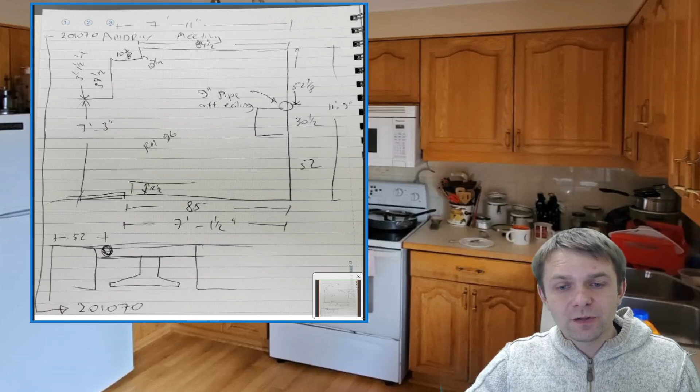I measured the space, and to give you an idea, this is how the kitchen looks. So this is another thing. When you measure and you have the cabinets like you saw before, in this location there was a pantry standing. So behind the pantry, they never knew that there's actually a bulkhead.

So remember this: when you have a pantry in the kitchen, when you open the doors, it's not as deep. There's a high chance that this pantry is going to have something behind it like a bulkhead. In this scenario, there are some pipes going through. The bulkhead above here, there's nothing there. This is just decorative. So this is going to be removed and we're going to put in a nice cabinet going all the way to the ceiling.

So this is just kind of how the kitchen looks all around. You see the exhaust pipe is off center. So you really have to make sure. This is me doing the measurements, going this way. So that's how the kitchen space looks.

So again, when you look at this, take your time and just grab a measuring tape and start measuring from the beginning, from left to right. Draw a plan of how the kitchen actually looks, and start measuring each wall. Measure the bulkhead and write everything down. Before you start designing, you need to have proper measurements.

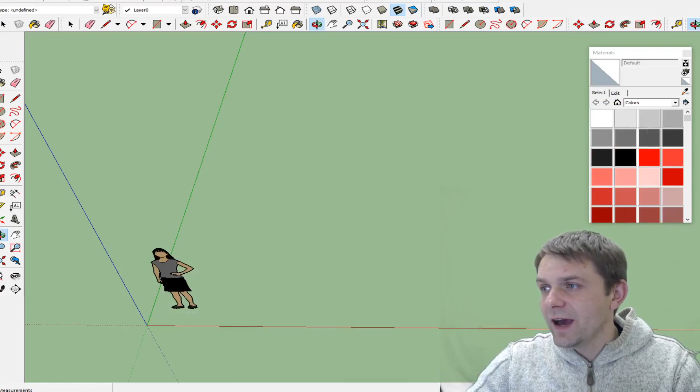You can use it and start drawing the walls. So we press L for line. We basically get a line and we'll start with some sort of measurement. So we're going, and the green line is indicating which location we're going, because you're actually drafting in 3D space. So whenever you draw, it's actually in 3D, which is pretty cool.

It's exciting and it's interesting, and it's fun because you're doing it in 3D, so it's not like AutoCAD software where everything is more complicated to do. This is SketchUp. It's easy and it's a lot of fun.

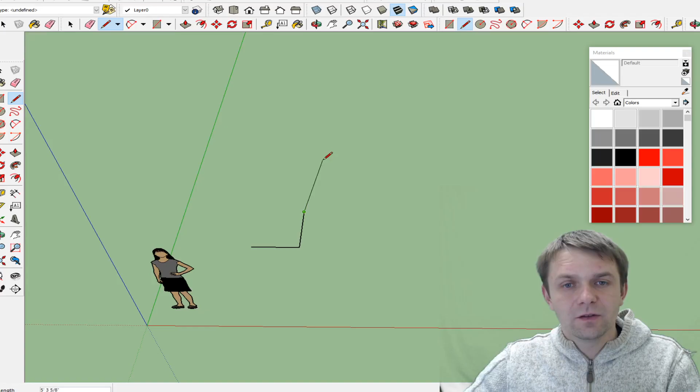So we have 37.5 inches going this way. Now you see when I point the line, if I do it this way, it's continuing, so it's green. If I wanted to go up, this is red, so that's going back. If I wanted to go up, this way is green, this way is blue. Now it's going up, but I need to go this way because I'm doing my bulkhead.

So we have this wall. You don't have to continue, you can stop and do what you need to do. If you want to continue, you continue. So this one together, 11 feet plus 9, 3. Oh sorry, so that's 11 times 12 plus 3, 135 minus 52 minus 52 equals 30. I have 30.5, okay so that's okay, 135.

So this way, again, if you see blue that means it's gonna go up, so that's not what I want. I want to be drawing on the green axis, so this is, sorry, I got 135. So 135, and you press enter. And now this way, I'm going, so now I'm on a green line, 80, I'm going to the walls, to the door, so 85.

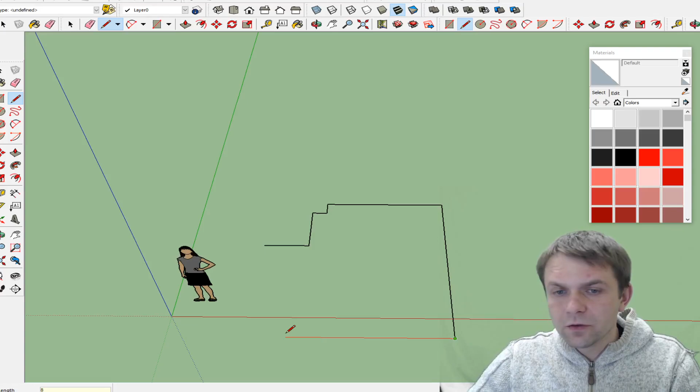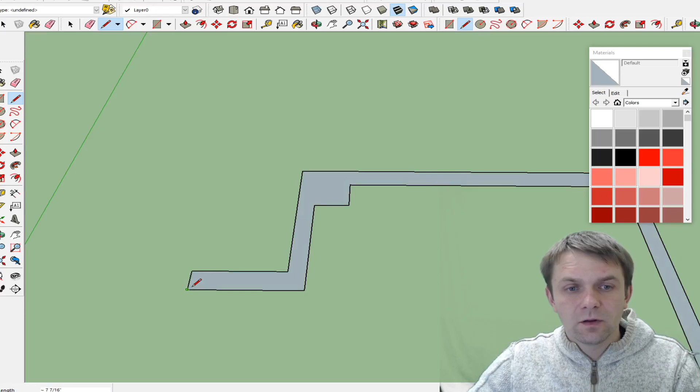So what I usually do is I go 6 inches this way roughly, and go this way. The great thing is that it gives me a point when it lines up. I don't want it to line up, I just want it to go like this and like that. So this is my floor plan. I have the floor plan ready. Now, the crucial step is to make this floor plan a

3D space, so we can play around. This is the size we have. So now we press P, and what it does is it pulls. Now what we need to know is our height, in my case it's 96. Type it in, press enter, press O for orbit, and then press escape, or press this button right here, the arrow.

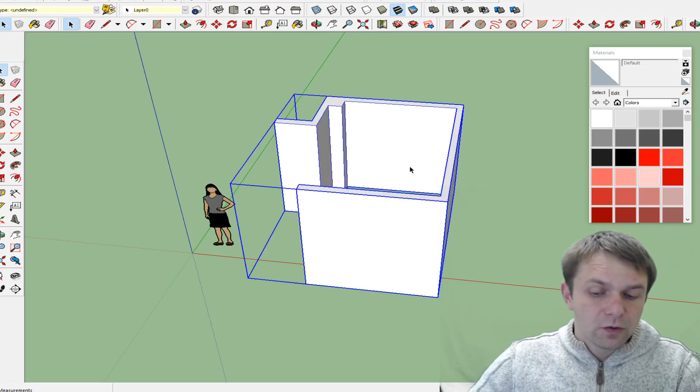And we need to triple click, right click, and make a group. So this is the most important part in your kitchen design, you need to have this step. You need to understand this step, because when you make a group, now this is its own entity, and when you add stuff to this wall, it's not going to get attached.

Because if I don't make a block and I attach cabinets, in order to modify something it's impossible. You have to start from zero, and you don't want to design half of your kitchen and then go back and start from zero. So this is your starting point, right? This is what you need, and then you work in blocks.

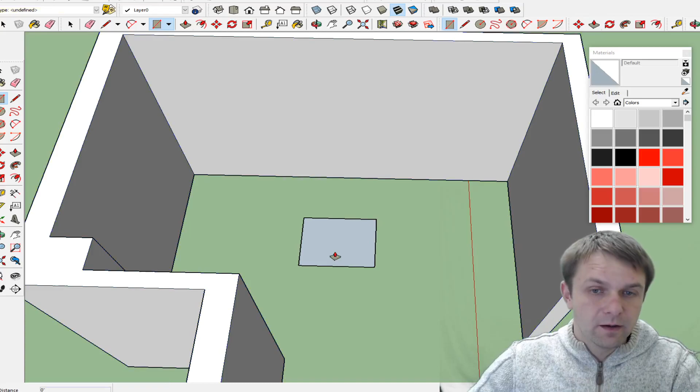I'm not gonna go too detailed on the actual cabinet design. I can make a line, and make a 30-inch by 26. I press R for rectangle, and make it 36 inches. This is gonna be my stove. Triple click, make a group, and M to move it.

Again, it gives me a center point, and then I can see if it's the center of this wall. If you want, you can do the measurements from here to here, 4 feet 4.5 inches, 4 feet 4.5 inches. Perfect, so I'm in the middle of my wall for now. This is where I want to start, this is going to be in here.

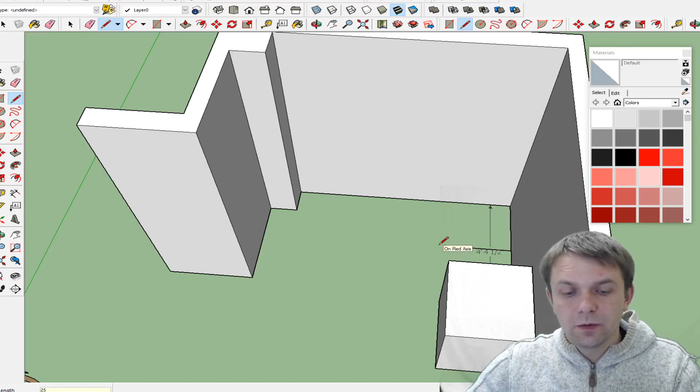I'm going to add a pantry. So again, our cabinets are 25 inches with the door. So L for line from the corner, 25. Now we go, this was a double. This is going to be a double on what? 25 by 25. So I'm just going to make a block in here.

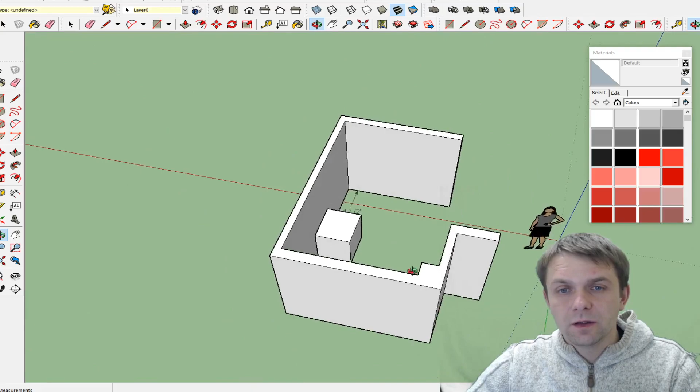P for pull, 34, 34.5. Make a group. So this is a custom design. So this one is going to be, here the client wants to have an oven. So we're going 30 inches and we're going 25.

And R for rectangle, P for pull, and this is going 94. Triple click, make a group. So you see how now these are totally separated, and they're not fixed, I can move the separate items.

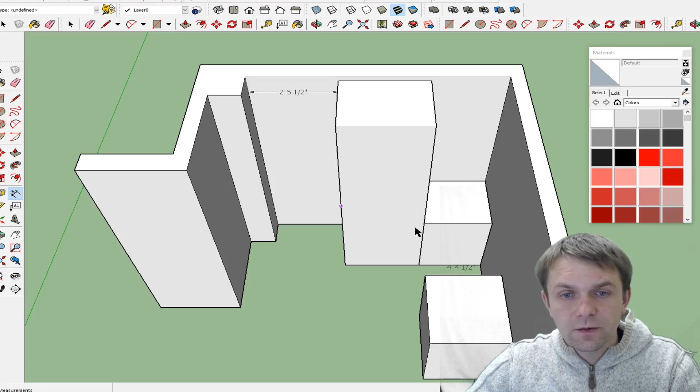The space that I have for the fridge is basically 29 and a half inches. So this is going to be a 28-inch fridge. So line, again, I want to be on the red axis, 28 by 26. And it's 72, so that's my fridge. Make a group.

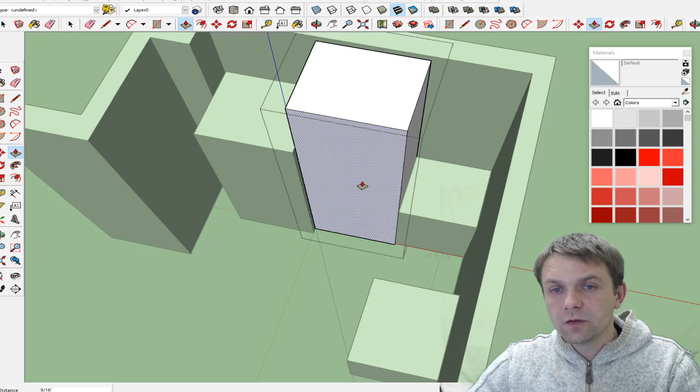So fridges usually stick out a little bit, which is fine. This one is actually going to be a 26-inch fridge. This will be custom cabinets, so we can play with the sizes. And again, I don't have exact specifications, so I'm using standard models.

For now, if I want to draw a pantry and the fridge is in my way, I can just hide it. So this is coming out 25. Let's say this is going to be a 9-inch pantry, and I just want to go to here, P, 94. Make a group.

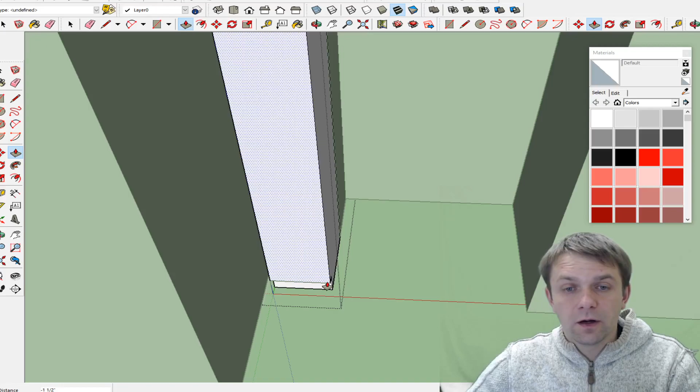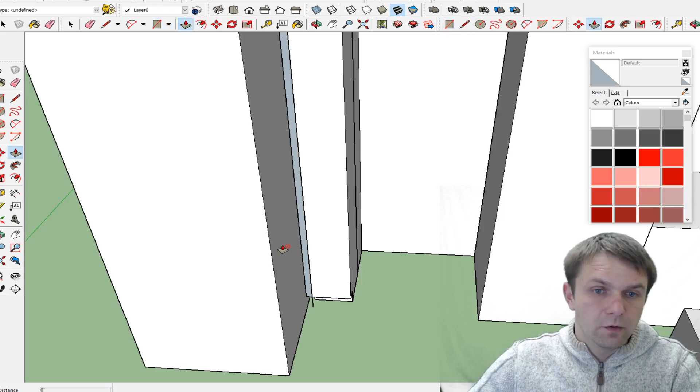4.25. So then you can go as detailed as you want. If you double click, you can edit this block, and you can go as detailed as you want, or as simple as you want. So let's say I just want to add a kick plate, so my cabinet has a kick, and then I want to add a filler.

R for rectangle, and I go to this point, P for pull, I go 2 inches, so that's my filler space. See how when I select this, it's actually doing the line that I created before, which is fine. You don't have to worry about that. This is just a filler, I can always delete it.

And now let's say I want to bring back the fridge. Actually, before I do that, I'm going to double click to edit. Now 4.25.

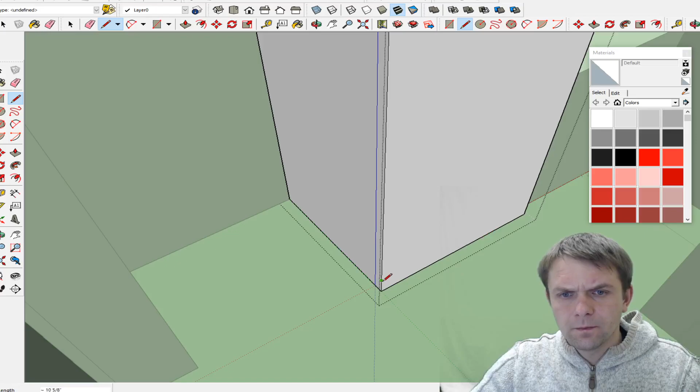Again, adding these details, you kind of have to know what cabinets you're going to be using, and what the specs are. But in general, just to get an idea, this should be... this really doesn't look like 4.25. Oh, it is. Okay, now again, double click.

I want to continue editing this cabinet. Double click, so you see everything highlights. Now I have a 12-inch drawer, so it shows me a midpoint of the line I just created. I'm going here, and then I do another 12-inch drawer, and this is going to be the oven and microwave cabinet.

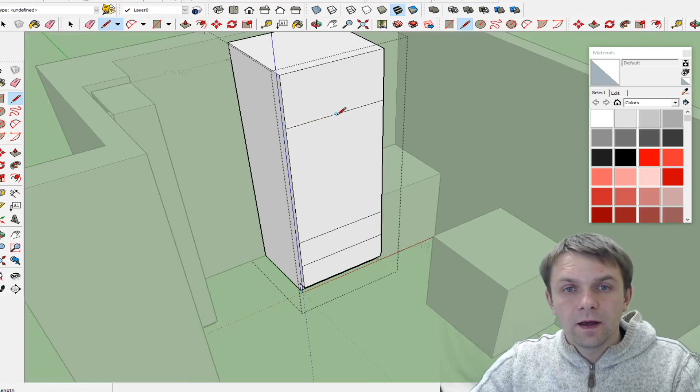Again, you have to check your specs. So let's say this is going to be 48. Okay, and 2 doors here. So that's it, I just press spacebar, unselect, O for orbit.

Now edit and hide all. I can see my fridge is right here, oven microwave combo. I can create another cabinet here.

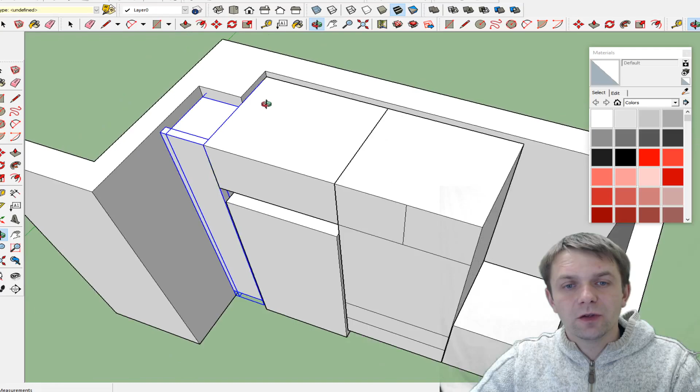So now I select rectangle, P for pull, and there we go. Now I can bring out this, press shift to select this item as well, M for move, and I just bring it forward, which is a good idea to leave a bit of space behind.

So now you can always shim it on the back when you do the kitchen installation, and on top of the fridge you can put a panel as well, so you don't necessarily have to make it very tight. If you're going to be building the cabinets yourself, then leave yourself room. In this scenario, there's not much room for the fridge because we want to put the oven so close to the countertop.

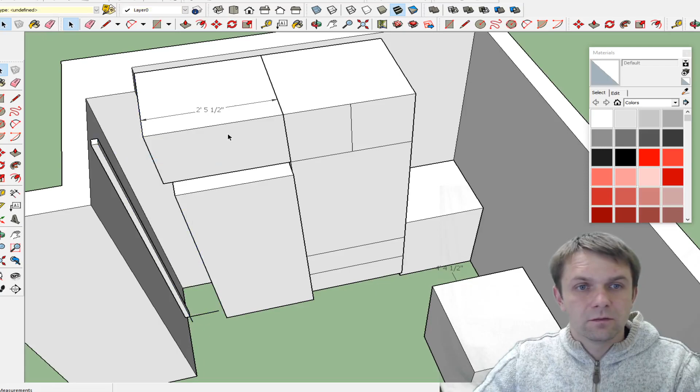He has a double oven, so in this case we're going very tight with this design because we don't have an option. He purchased it and he cannot return this item.

So 24. Okay, so I can hide this, and so 1.5 inches, 1.5. So now I have 28 inches. So basically...

See, when I don't have a block, this is what happens. Basically, you're stretching the cabinet and it will start dragging. Make a group.

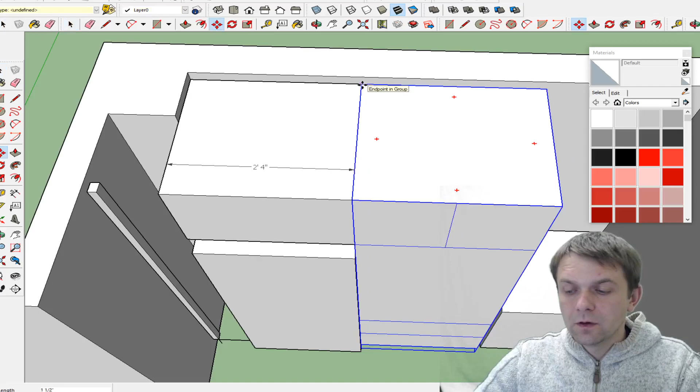So that's going to be 1.5. I'm going to shift everything 1.5 inches here and move. Okay, so I created a little bit more space here.

And again, one option is we can fully block this corner. It's totally up to you. There are other ideas as well that you can do, but basically it's as complicated or as simple as you want to do it. What I'm going to do is create a spacer.

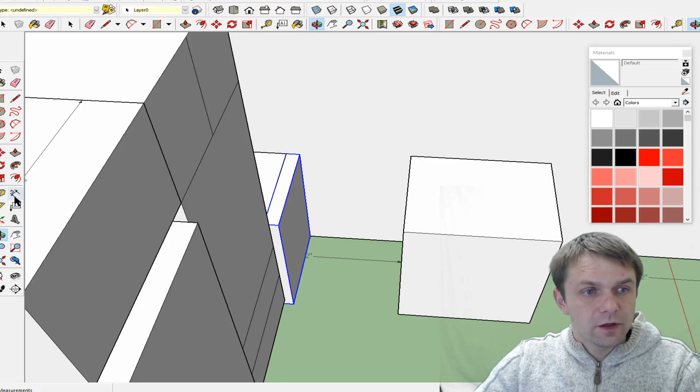Because you have drawers and they're going to be opening this way, we're going to create this cabinet. So that's my filler, and let's measure here. So we have 24.5 inches. Perfect, so I create another rectangle, P for pull, 24 inches, and we're good to go.

So now line for 25. So I have P, and I go back 3 inches. Now line 12.

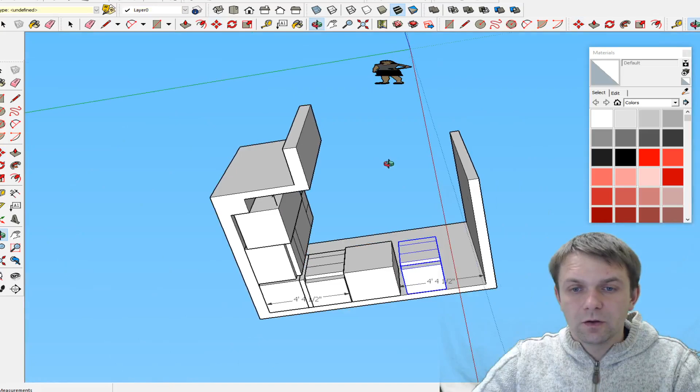Line 12, and that's it. Now triple click, make a group. So we have our kitchen and we have our cabinet.

So this is going to be a bank of drawers. I want to do the same thing on the other side, so I can just press Control C, Control V. I put a cabinet, orbit.

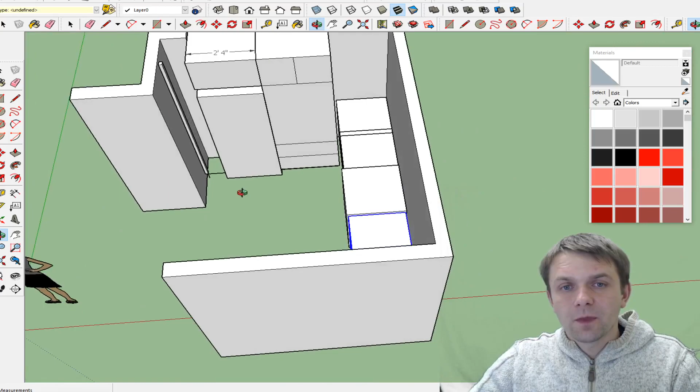If you wanted to line it up with your stove, if you have the latest SketchUp, you could also download models online, so you can get a stove and a fridge. There's just a bunch of other ideas. If you get a paid software, you'll have even more options, which is very nice.

And so we have this. Now what we're gonna create here is the same idea, so I'm just gonna copy Control V and copy Control V, just placing it in here for now. Again, M, put it in the corner, M. So this is...

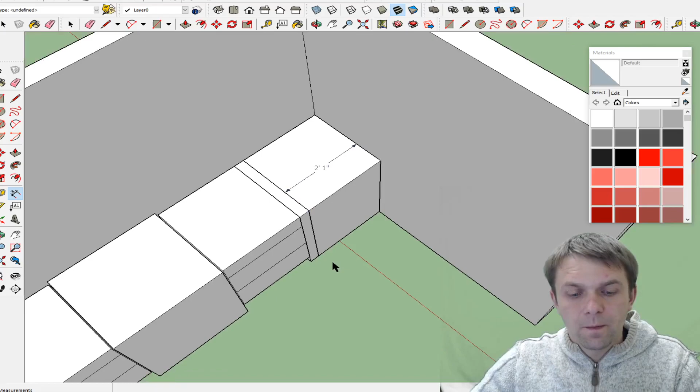Okay, so this cabinet is basically here. Orbit. This was 25 inches, right? 25, that's right. So again, I can just line this up like this.

P, 3 inches, and R for rectangle. We go P, let's say it's a 30. It's also a 2-inch spacer. Oops, 2-inch.

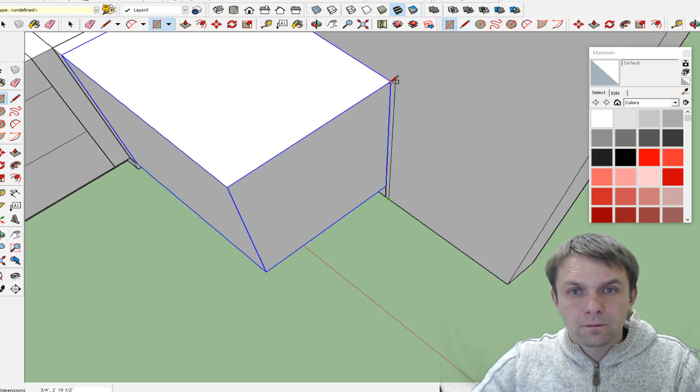Make a group. Now R and P, let's do a 32-inch sink. Make a group. Now line it up, 0.75, 0.5.

P 25, so I made a panel for the dishwasher. This is nice to have because the kick plate just butts into it. You don't have to worry about finishing the kick.

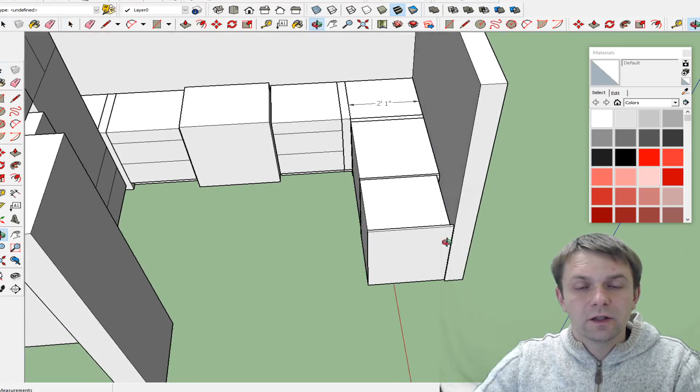Now your dishwasher most of the time is 24 inches by 24. R, P for pull, 34.5, make a group. And you need another gable, copy and paste.

So we are kind of on the line. We can bring out the dishwasher. We can add some details to the dishwasher later. This is now just a general layout of the kitchen and how things are.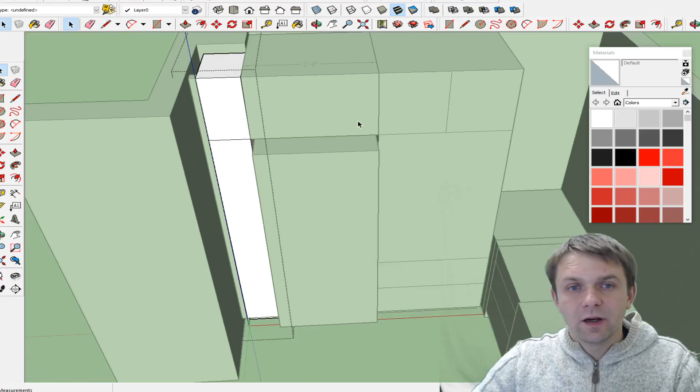So now if you want to see this cabinet, unhide all. So there's the cabinet there. And again, depending on what cabinet you're using, if you're using standard or custom, if it's custom, go ahead, and what I like to do is line everything up.

This is going to be a double door. It's nice when everything is symmetrical. Again, maybe you're the type of person that just doesn't like the symmetry, likes everything to be exclusive, different, and exciting, and that's totally up to you.

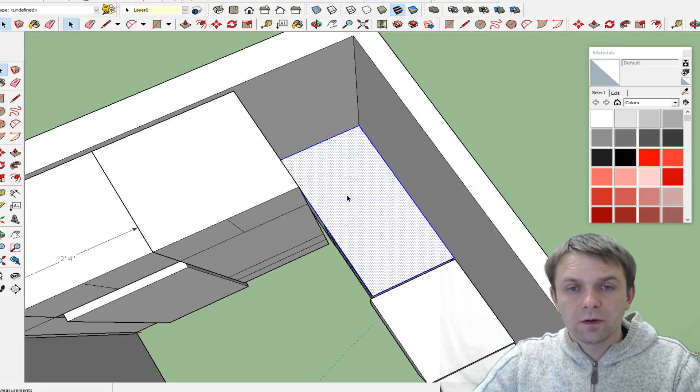Now what I'm going to do with this corner is we're going to make a hidden cabinet inside. So let's see. This is going to be a cabinet that's sitting on top of the countertop.

So what we'll do is create P for pull, 1.5 - that's your countertop, and your countertop usually comes out an inch this way. So make a group. Again, very important, the most important is making a group.

So as you see, we're gonna have to put a filler on there. Oh, where did it go? So there you go. Now on top of this, I usually go up 0.75 and we just make a cabinet here.

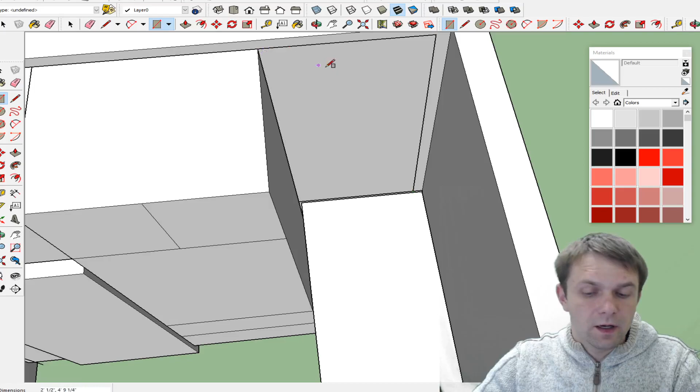And let's come out 2 inches from here. R for rectangle, and this is going to be our cabinet here. P for pull. Okay, so let's make a group here.

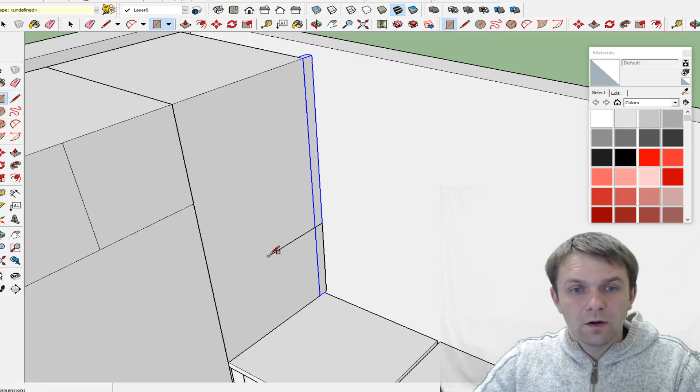So again, this is going custom cabinets and creating a custom design. So you would have to play with this and see what you want to do. Again, the more creative you get, the more complicated you get, the harder it's going to be for you to get this and make this. But again, we're getting creative here, showing you what's possible.

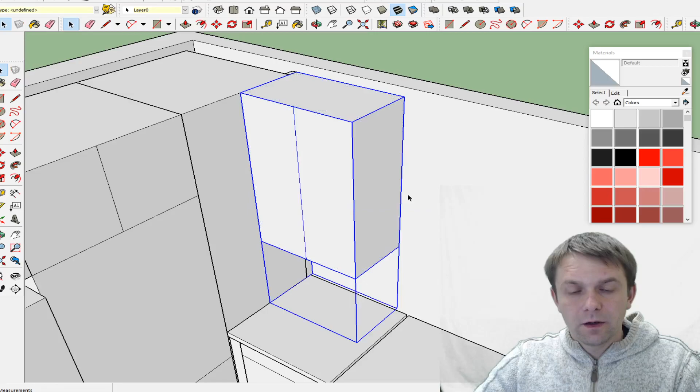So that's a spacer. Now we have 20 inches to the countertop, and it's 14-inch uppers. R rectangle and P for pull, and this is going to be a cabinet, and let's say 3 inches. I usually offset 3 inches so there's enough clearance for your hood, so the hood is not very tight.

Double click, make a group. So you see it's selecting all the lines that I unselected. Again, rectangle selected, P for pull, 0.75. This is a finished gable that I'm gonna apply after, and this is basically what we get.

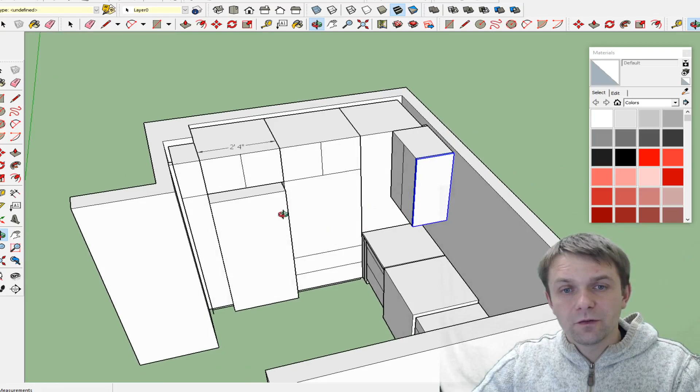So all this stuff in there, we can either create a custom cabinet, we can add a cabinet in here. What else can we do? There's not much we can do.

Again, we're working here because of the double oven. It's really important for him because he already has it. He wants me to find a way to place it in here, so that's one of the solutions that we have. So what we can do is actually divide, so I can explode this.

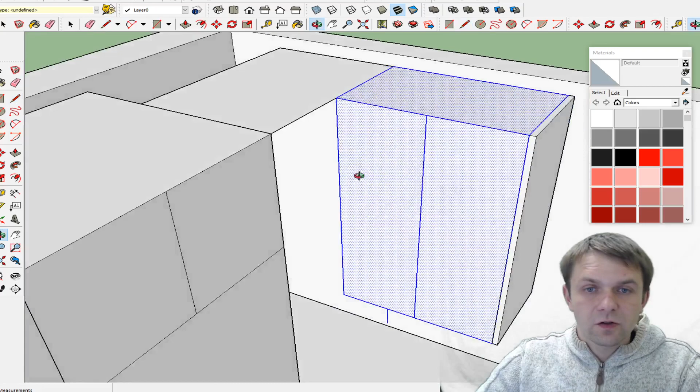And let me see if I can make this work. So if I hide this and I hide this, so I explode. Now we go back, let's say 18 inches, and we go here, here, and we go here. So what I just created is a custom cabinet.

That's gonna go to here, and this cabinet is basically gonna be like a big cabinet that you can access from here, and inside is going to be a different cabinet that you can access this area in the bottom.

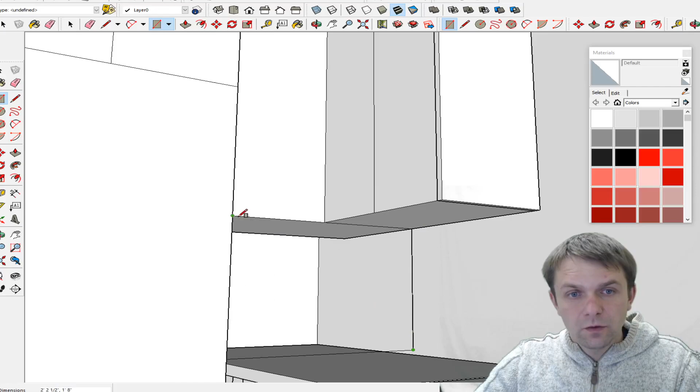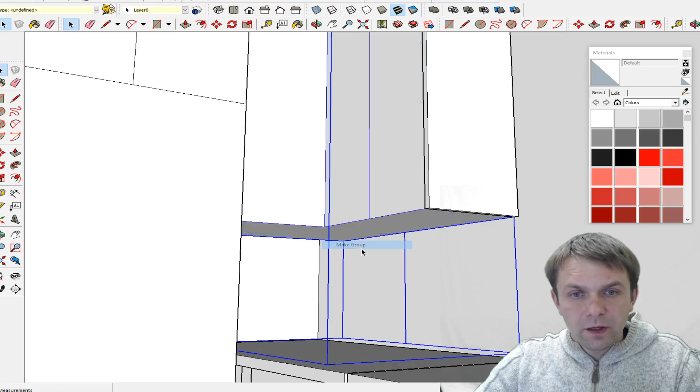So technically this is all supposed to work out well, let me just see if I can. So from here to here, and this is going to be another cabinet that's 24 inches deep. Oops, so you see how it's selected now, so I want to keep it separate.

So I don't want to erase this line, I'm gonna make a group, and let's make another cabinet 24. So that's gonna go, so now I have access to the upper storage. So this is going to be just a big upper cabinet that we created.

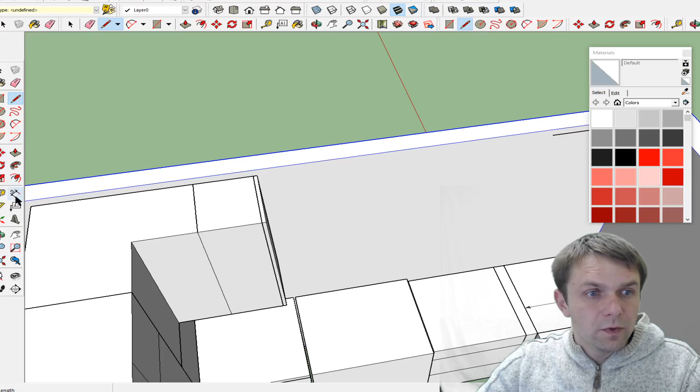I can probably even make it separate. So this is going to be one cabinet, this is going to be a separate cabinet, and let's see, how do we get here? So 2 inches from the back.

24. So how big is this door? 11.5. 14. So 26.

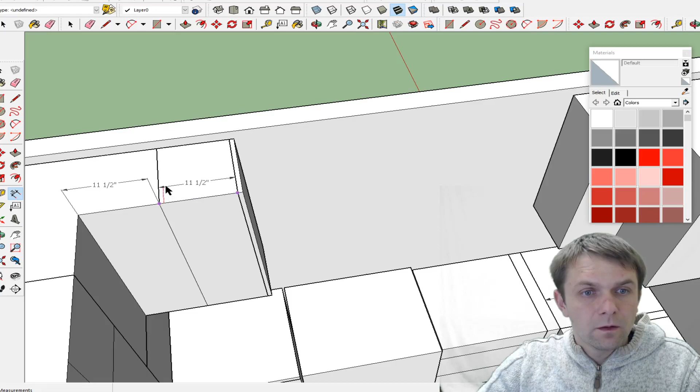So 14. Erase, now L, 14 this way. Okay, so I have, and 14. So let's say this is my corner cabinet, and now how big is this door?

11.5. Okay, so measure, no, it's T for tape, so this is 12. And 5.

So as you see now, the design becomes asymmetrical. So I'm not getting 2 cabinets on one side and 2 cabinets on the other, and I could technically shift everything. So my center point is from here to here.

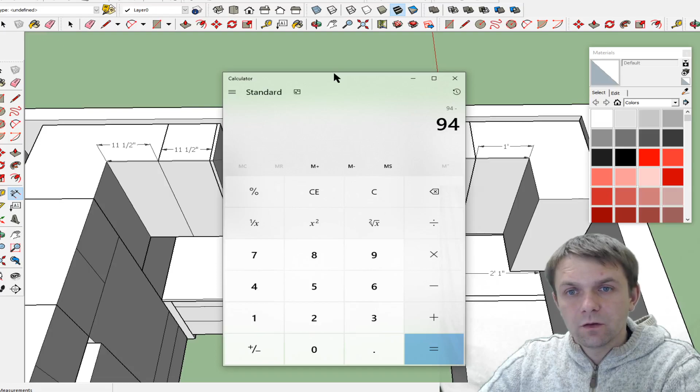That's 7 feet, 7 times 12 is 84, plus 10 is 94. 94 minus, I'm gonna take 34 inches for the hood. 32 and 2 is 34. 60 divided by 2, that's 30 and 30.

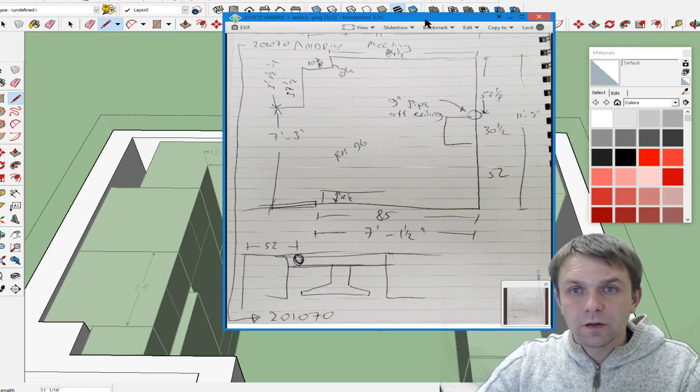Okay, so the idea also, I can also find out where my hood is. So the center of my stove that I marked is 52 inches. So here is 52.

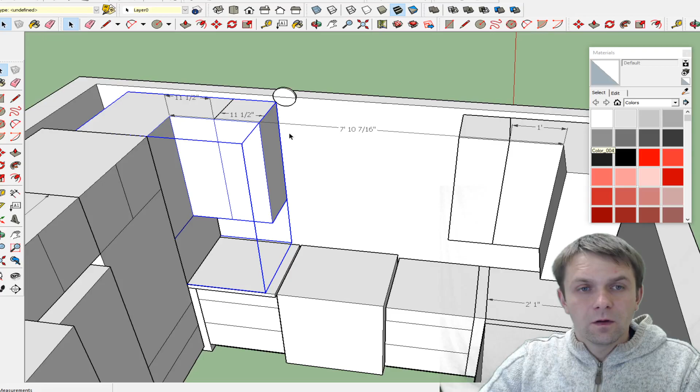Now I can press C for circle, and this is just to give myself kind of, this is a 9-inch pipe. Erase, oops. So I made it specifically in a wall, so this is where the pipe is. The panel just ends there.

Okay, so let's hide this. 12 and 12, okay. Now again, I can make 30 inches to the hood, 12 and oops, I mean this way it's 15, 6.

This is going to be a more modern 15, 6. B, it's going to be 12, and then a line, and B another 12, so maybe not even, let's say 6, like that. Triple click, make a group, so that's my hood.

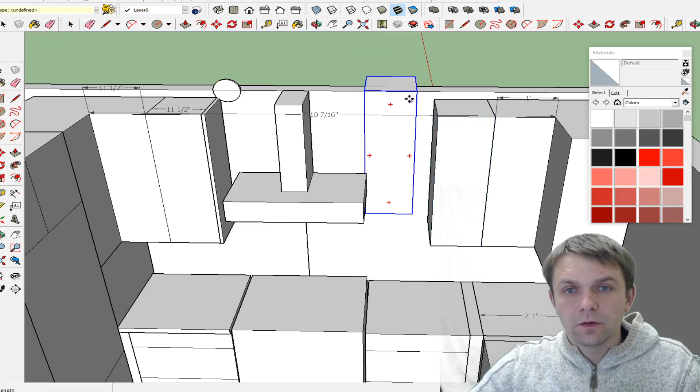Now my pipe is here, so it's one option, like I said, is to drill a hole. Another option is to have a flex pipe and hide this with the bulkhead. So here what we're gonna add is Control V, so we're gonna have 3 doors on this side.

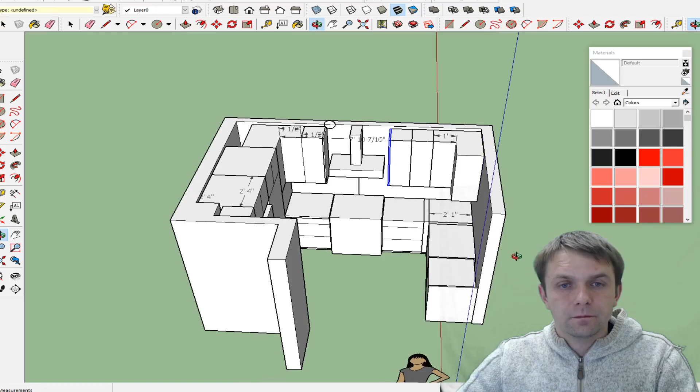Or okay, we're gonna have copy V. Okay.

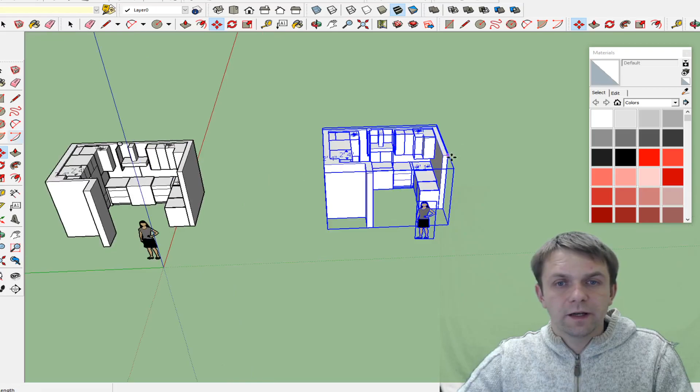So P for pull, 1 inch. Okay, so I'm gonna leave this on hide all. Let me delete this. So we have 12, 12.

Okay, so that's 1. So I just selected it all, pasted, and now I'm gonna try something else. So I'm gonna make a line, and I'm gonna move this hood.

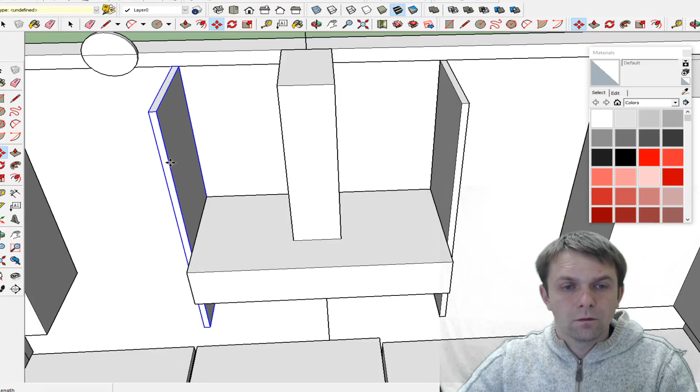Where's the middle of my line? Okay, so that's the middle. Move. Okay.

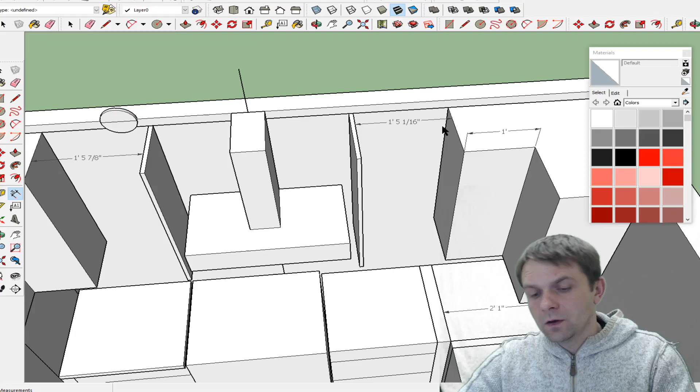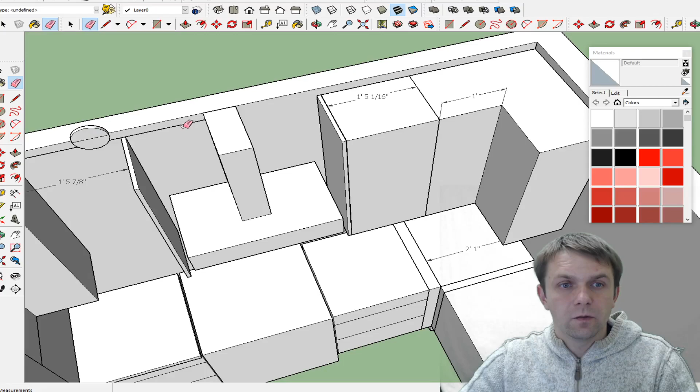Everything is lining up, so 12, so 17 inches. 12 plus 5 is 17. So now pull, let's do a 17-inch cabinet.

See, I don't need all of these lines to be attached in one block. Make a group. Line these up.

Copy V. Grab this corner, paste, and move this. Okay.

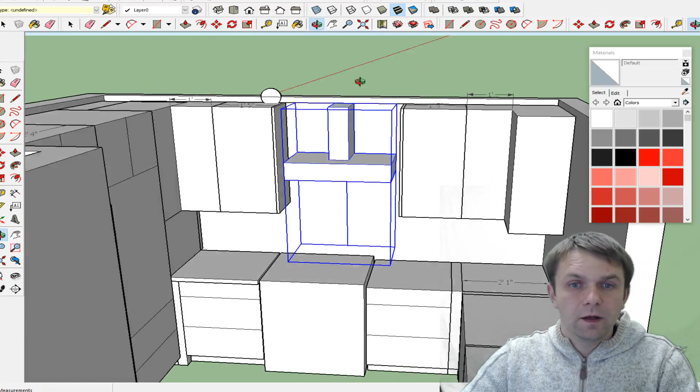So now let's say F, I want to offset this 6 inches. Line. Okay, so I lined up my hood, and I'm gonna get rid of this cabinet, so I just made a line here. Oh, let's double click, I can get rid of this line now.

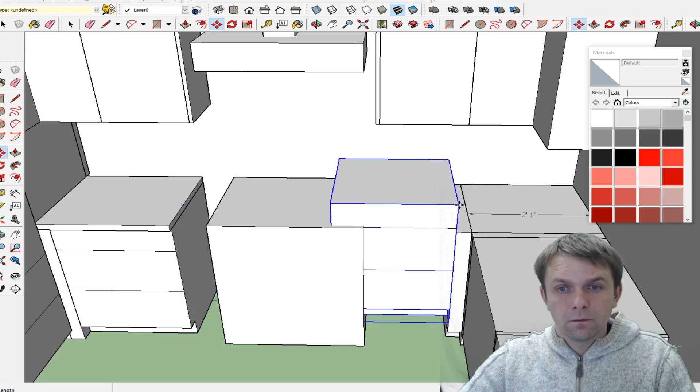So what happens now is I have more of a symmetrical design on top, I'm gonna move this, but the bottoms are going to be a little bit off, which I don't mind.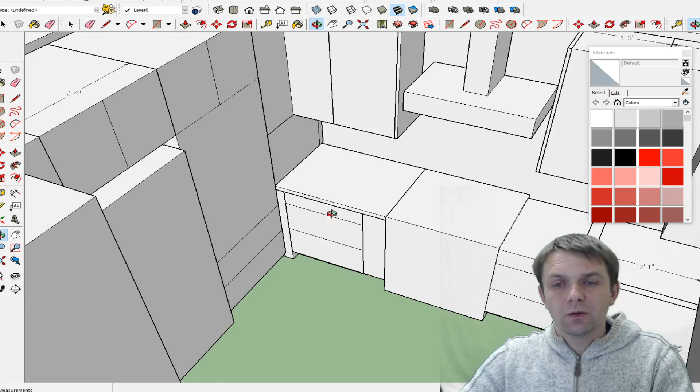This cabinet I gotta delete. Then we have just an empty spot because we can't reach it anyways. Then this door opens this way, so you have that. Beside the pullout we can make another cabinet, and that's gonna go to this. This could be a spice pullout. This is also good to have more counter space, so now we're not in the center of the room, but it offsets us. If somebody's standing here, we're not too close to each other.

Now we can also move the lady and see if you're standing here. See, this becomes an issue a little bit. If 2 people are standing here using the sink, it's a tight spot, so there's not much we can do. At the end of the day, it's how you want to work with your space and what you want it to accomplish.

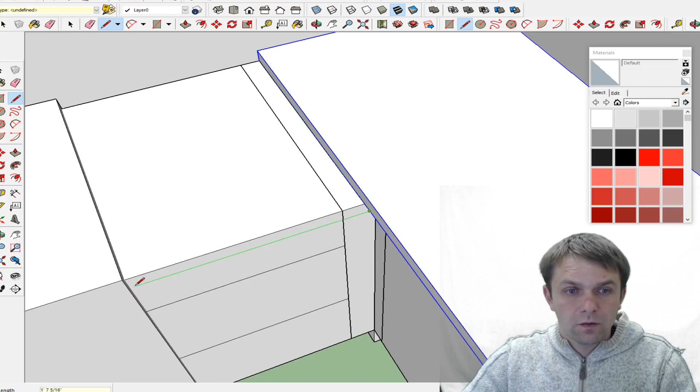So let's get this 26. From here to here, be 1.5. Triple click, make a group. Now orbit. L, 26, and now this way. R, 1.5. So again, as you see now, I can explode this and now make this all into one, make a group.

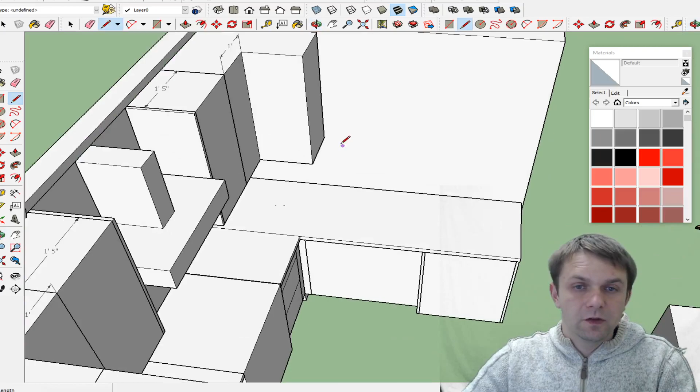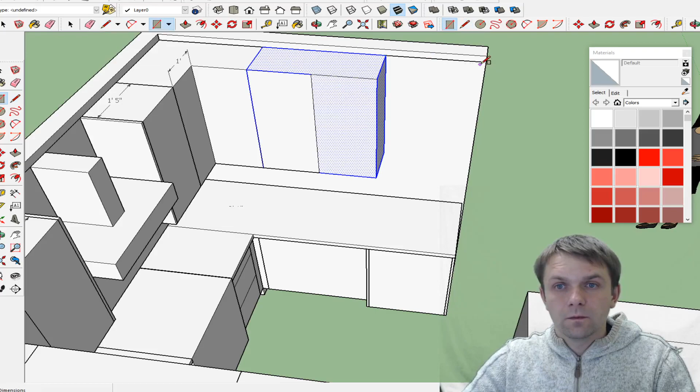This also shows me if you want to keep a seam, this shows you a countertop connection, so you could potentially keep it and see how your seam is, you're gonna have a countertop. Possibly they make it out of one piece, or you could have a connection in there. Now above the sink, it's totally up to you if you want to raise the cabinets or keep them the same. I'll just keep them all in one line.

This is going to be 2 doors, and another cabinet that's 24. Also 2 doors. See, so now this is all a group. I really don't want to do that, because in case if I want to change this later, I won't be able to. So make a group.

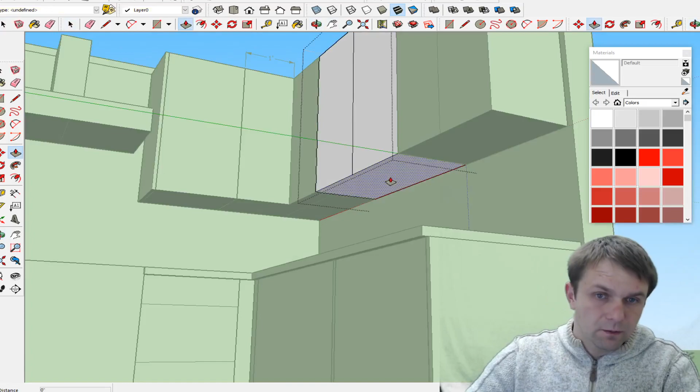L, 24. Now rectangle, make another rectangle, and add the line here. So this is going to be a double door. Make a group, and so here we have cabinets all the way.

Now for example, if I want to raise this cabinet, I can just double click, P for pull, and say 6 inches. So this becomes an upper cabinet. This is where your sink goes, that's your dishwasher, and this cabinet is double click, 6 inches. Let me see under, there you go, L, 6.25.

There you go. And so we have our sink, drawer, spice pullout. So that's it. That's our kitchen layout.

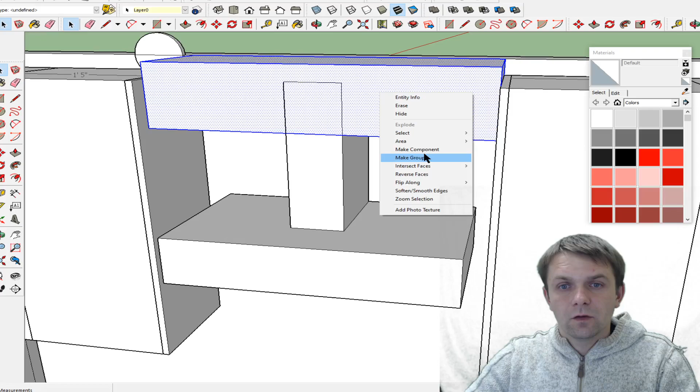And this is how it looked before. See, it's perfectly in the center, but the pipe is here. So now, what have we done? In order to get from this pipe, this cabinet has to be notched out, and it's a 6-inch pipe, so basically he would have to do like an 8-inch box by 12. So from here to here, P inside. So that's the idea. You'd have to do a box like that to hide the pipes.

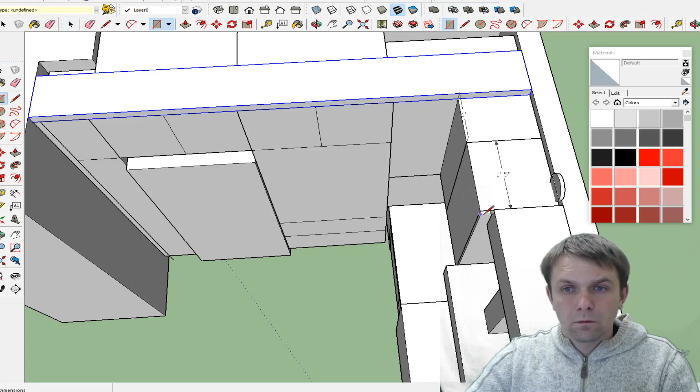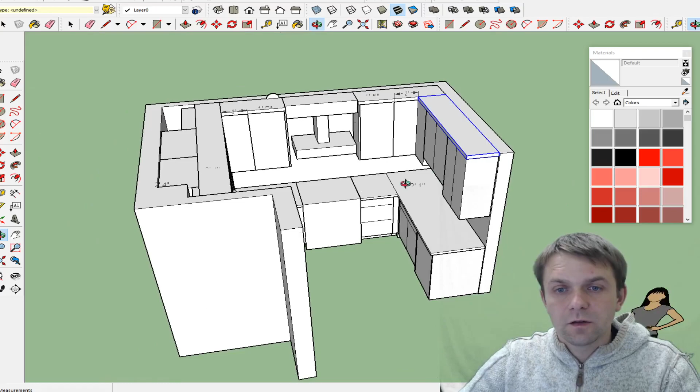That's going to be the ceiling. Again, that's not how we're going to build it. We're not going to build it solid, but this is just an easy way to display it for yourself, so you know there's no spaces above the cabinets. So you can either put a distance, or you can just bring it to line up with a triple click, make a group, and done.

So this way, if you want to see everything, each block is being painted differently or separately. That's why it's nice to keep it in blocks. You can play with your colors and see how your kitchen looks. You really have to spend the time to do a sink cutout if you want, and add all the appliance details. But in general, this is an overall design that the client can review and say, okay, I like it or I don't. Let's see what we can adjust, right?

So there you go. This is in general how you design your kitchen. From this point, I'm gonna go into the next video where I'm gonna explain how you make a cut list out of this, and then how you can make this kitchen yourself as well.